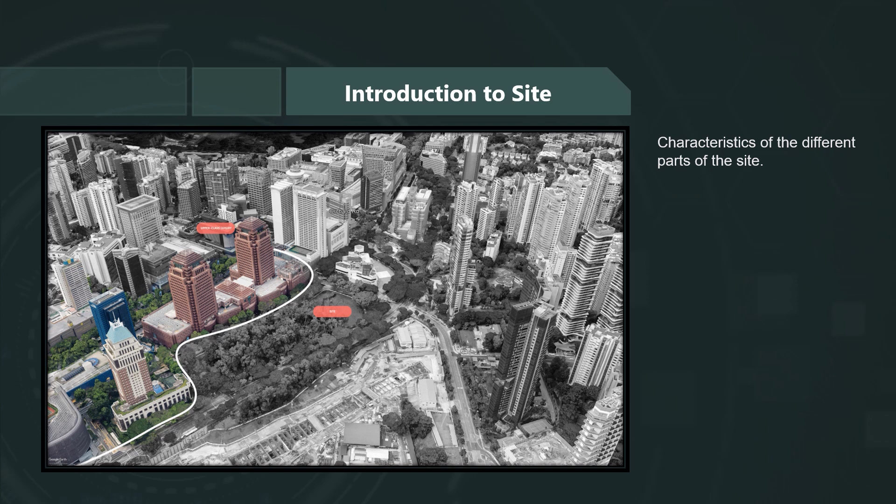The concept revolves around the notion of rebirth: to fall, floated to eternity, a metropolis reconstructed. Rebirth is adopted as the main focus, to rise from the ashes to become something greater. A cycle of life and embracing death, to put it simply.

We saw Orchard Road as this fading metropolis losing its shine as a premier shopping district compared to the late 90s. Our project is envisioned to be an agent to support the different surrounding buildings of Orchard, to help them transcend to the next stage of the cycle to prosper in a post-digital era.

Similarly, it acts as a vessel that gives life to new entities. We then integrate our idea inception process. Method 1 starts off by us redefining the idea of a mixed-use building by regrouping different programs.

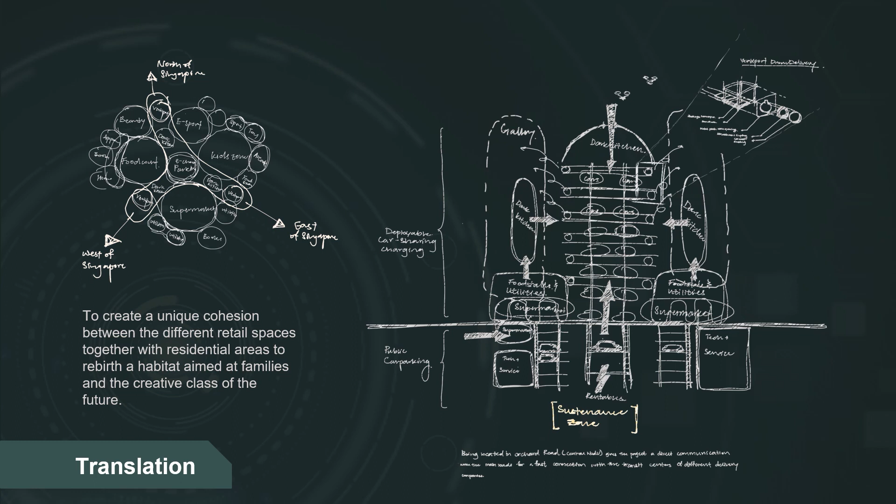It is then followed by computation. Here is a summary of our building components. The main idea is to create a bond between retail and residential to rebirth a habitat aimed at families and the creative class of the future.

Delving into some of our key challenges, we had our differences in ideas and priorities, but the bigger issue was the limited physical collaboration due to the COVID situation, and we were forced to communicate online during the most crucial parts of the design stage. Moreover, the limited learning resources was a struggle for our young team.

Nevertheless, we got to witness the beauty that comes about with the collaboration of engineering with architecture, and it exposed us to a whole new world of software.

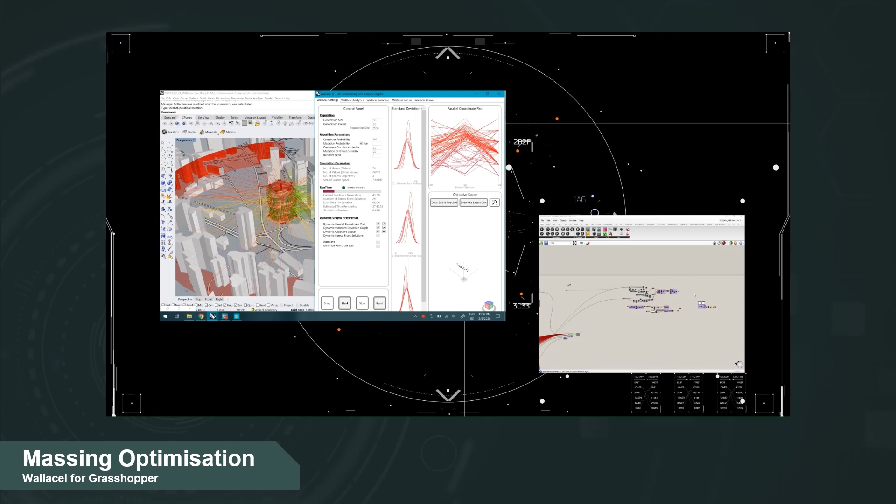For massing optimization, the Wallacei tool for Grasshopper was used to optimize the initial form with the help of 3 objectives: maximizing radiation, floor area, and views.

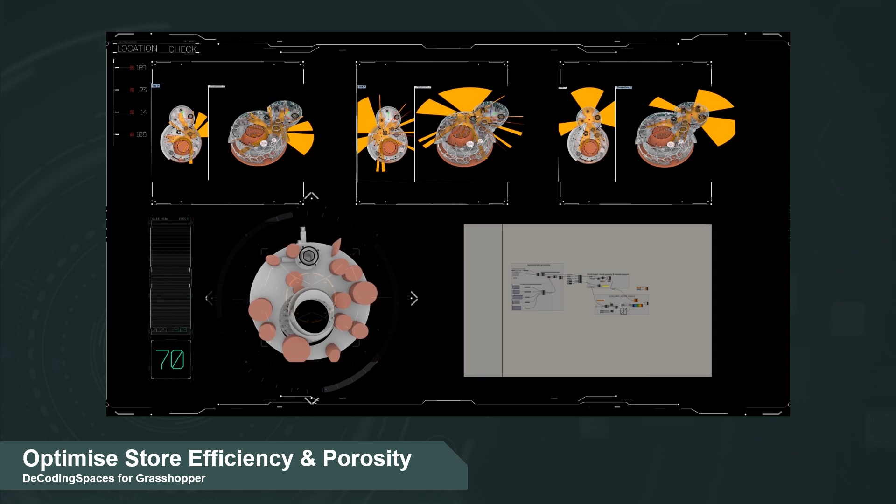The Decoding Spaces tool for Grasshopper was used to optimize efficiency and porosity of retail stores, resulting in a recreation of a marketplace and maximizing opportunities for free wandering.

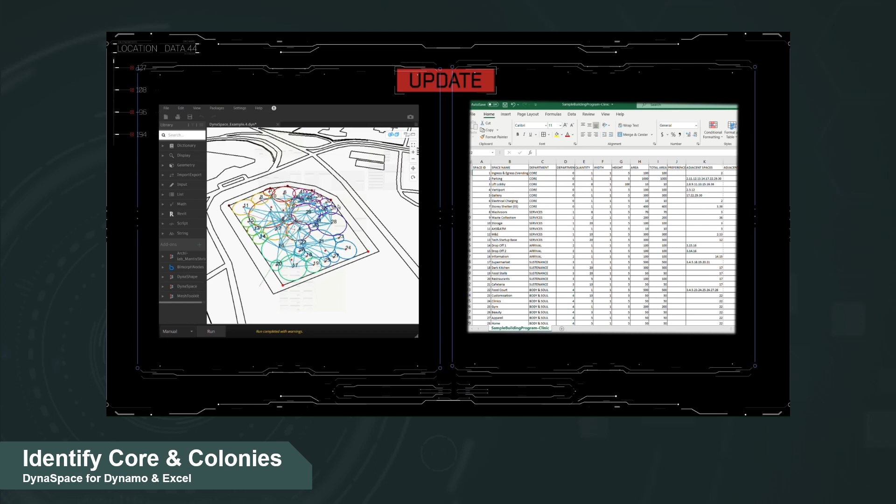With the aid of Dynaspace on Dynamo and an Excel sheet, it identified the estimated location of the central core, 3 colonies, and small programs. The 3 colonies are namely sustenance, body and soul, and play.

Lunchbox tool for Grasshopper was used to model out the external and internal diagrid structure of the central core.

Autodesk Flow was used to run the wind analysis, which helped us optimize the location of the spheres. This ensures that ventilation is maximized in the 3 colonies.

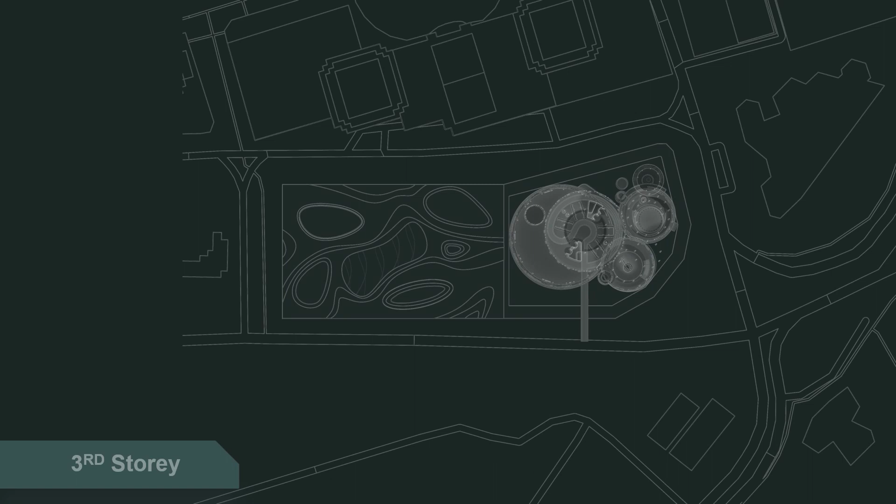The 3rd story shows the intersection of all zones and colonies. As it goes higher to the 17th floor, there is a swimming pool, jacuzzi, together with the service apartment units. The service core is in the center.

Co-working tech offices sparsely fill the central core. A vertical delivery system is used for transporting goods and purchases.

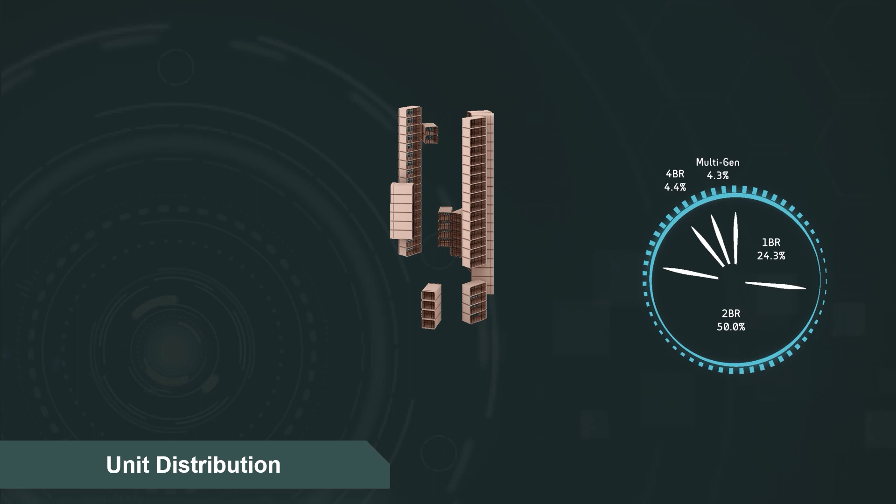The unit distribution of the service apartments are made up of 24.3% 1-bedroom units. Here are some schematic plans.

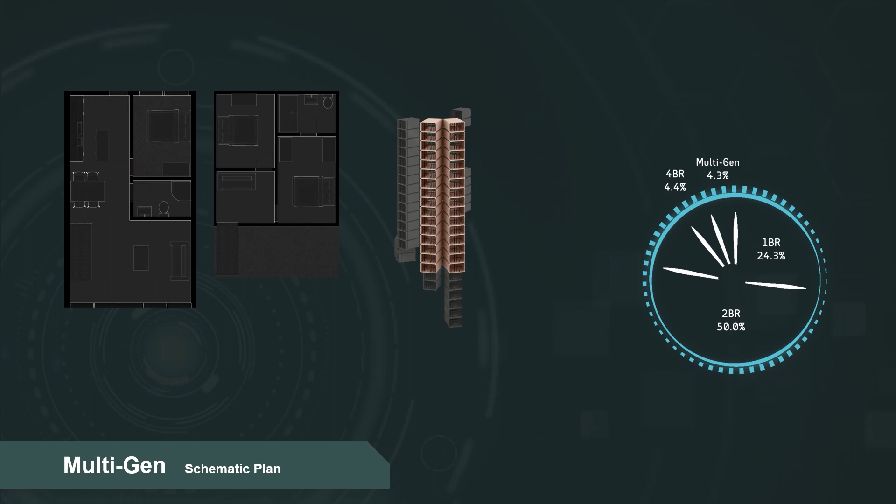Moving on to the 2-bedroom units with 50%, 4.3% multi-generational units, and 4.4% of 4-bedroom units. This is an interior visual of a unit.

Let us take you through the commercial spaces in the building. In the Body and Soul colony, there's a spa and a jacuzzi accessible by both service apartment guests and other patrons. A playground is designed to allow kids to play with their parents or grandparents.

The idea was to create a cohesive environment for young families. Themed family parks like Kidzania are able to take up spaces in the play colony.

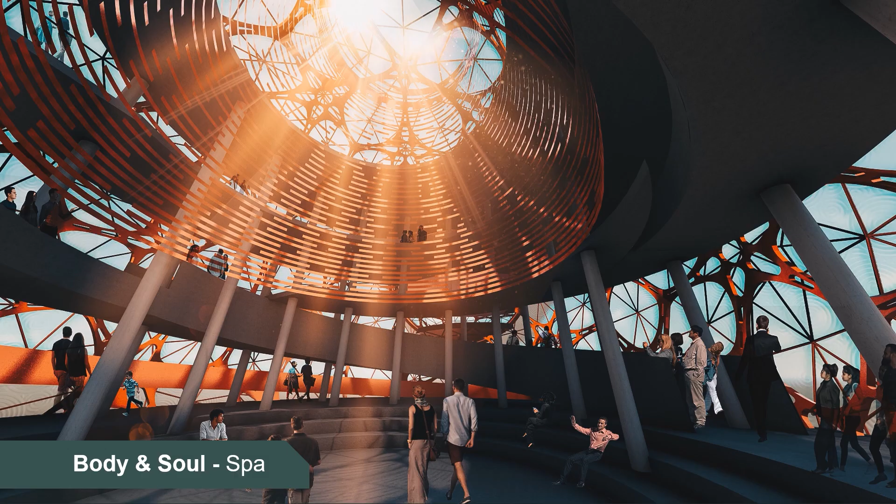Descending back to Body and Soul, it is designed to allow some light in to set a calming mood, to allow patrons to find some spiritual comfort.

This is when technology takes over. The Internet of Things is a fundamental aspect of a smart city.

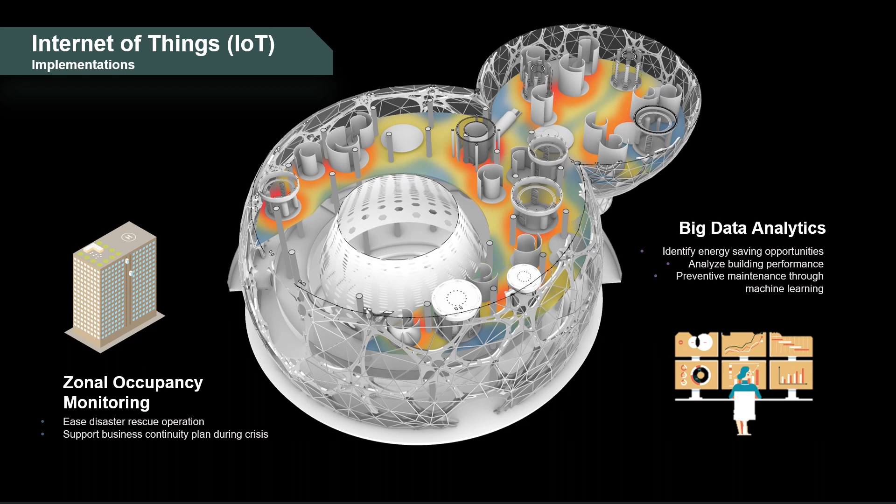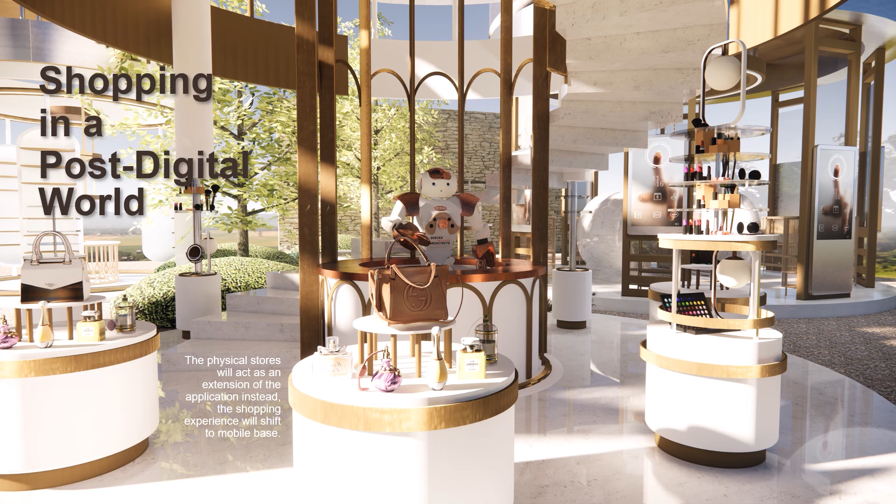A few of our implementations would be zonal occupancy monitoring, big data analytics, image recognition and heat mapping, and BLE beacon technology. Shopping in a post-digital world will have physical stores act as an extension of their mobile app. Other features include much faster payment systems where one can walk out of a purchase. Customer recognition is implemented to personalize the experience, along with self-checkout kiosks.

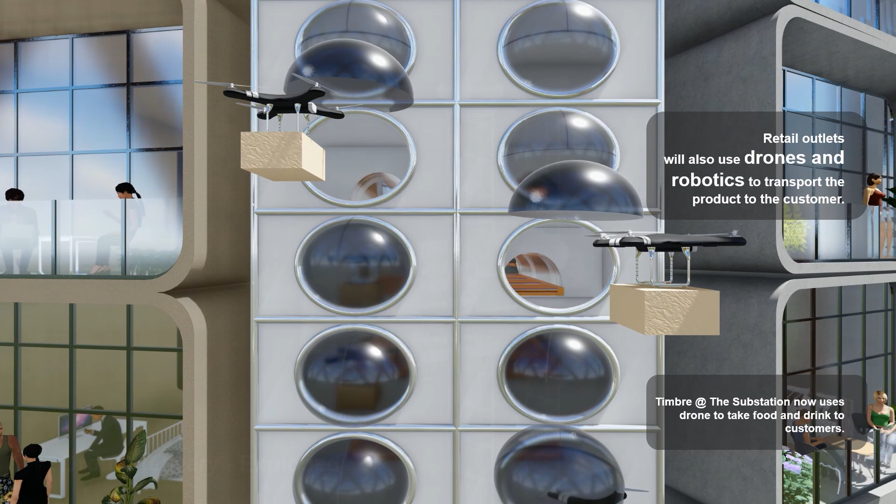Retail outlets will now be able to use drones as a vessel for transportation. The internal structure for the delivery tubes and drones is as shown.

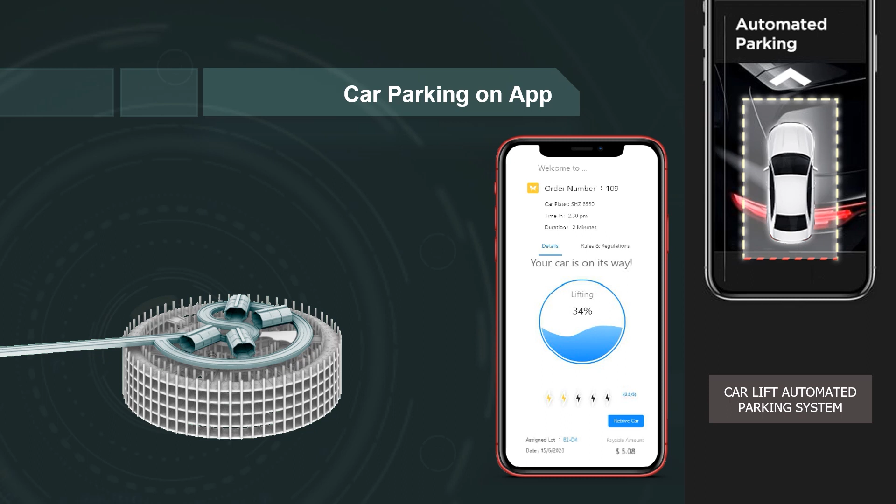Introducing the mobile app, catering to developers, shareholders, apartment guests, and shoppers. A store voting system keeps owners informed of trends and performance levels. An application will be invented to provide a smooth car parking experience. Applications can also keep updates on events held in the esports arena located at the Play Colony. AR and VR arcades are also accessible to the public as they rise in popularity and demand.

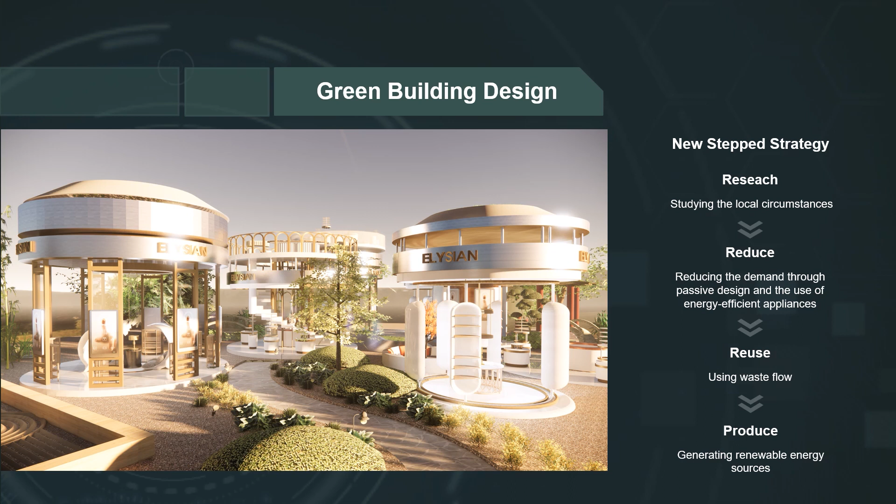When designing the green building, we applied the new stepped strategy developed by Delft University of Technology. In our design, local circumstances such as climate and facilities were first identified, then generated on-site to minimize dependency on energy produced by fossil fuel.

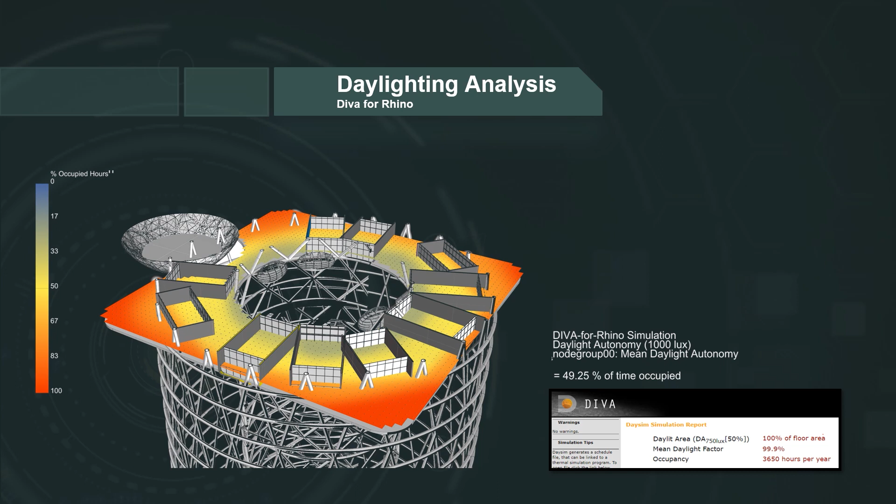The daylighting performance of the space is analyzed with software called DIVA. This is the simulation of one of the marketplaces, which has a facade made of smart glass. The result shows it can be operated with daylight during 50% of its operating time, with a target illuminance of 750 lux. With the help of Ladybug, we were able to conduct solar analysis on the exterior facade.

This further minimizes solar heat gain. The slide above depicts the shadow cast at different parts of the day for the June and December solstice.

This is an overview of the key features integrated into the building. An underfloor air distribution network is chosen. On top of that, we hope to cut down electricity usage by using VVVF regenerative lifts, which can save up to 60% of the energy used by lifts.

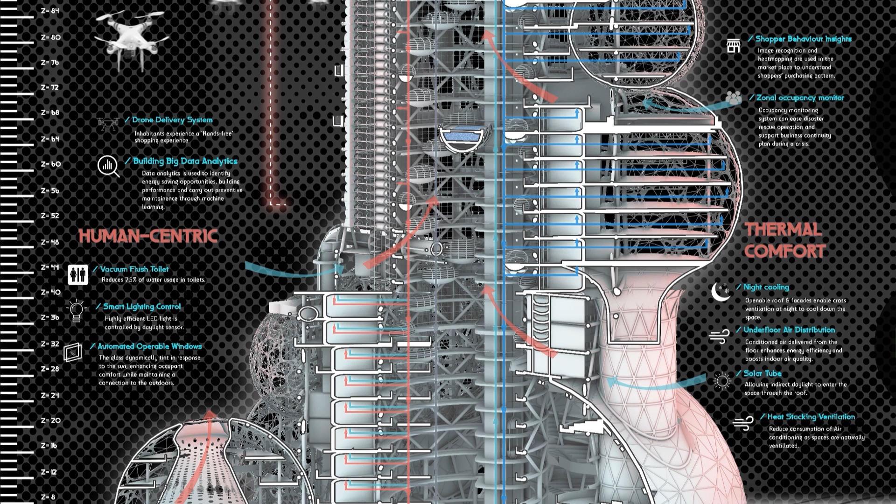The building supports a heat stacking effect in an effort to naturally ventilate spaces so as to reduce reliance on air conditioning. Rainwater is harvested from the rooftop and facades, and will subsequently be used for the building's flushing needs and irrigation.

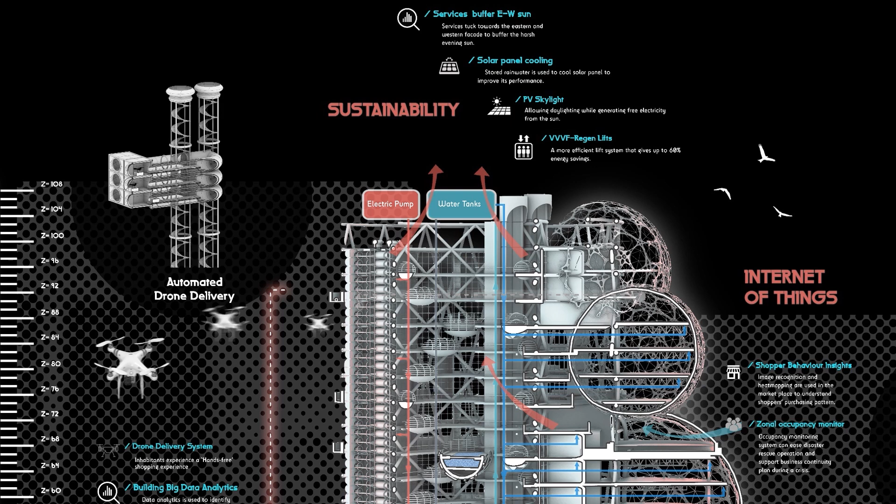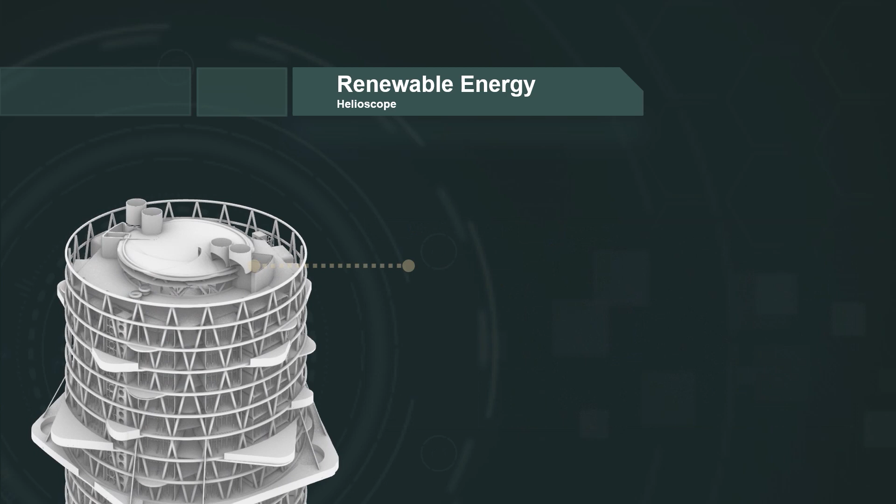Being in the tropics, solar energy is widely available on-site and will be harvested with polycrystalline photovoltaic cells. An integrated photovoltaic glass skylight will be used for the roof of the core, using software such as Helioscope. The peak capacity of the PV system is estimated at 120 kilowatts.

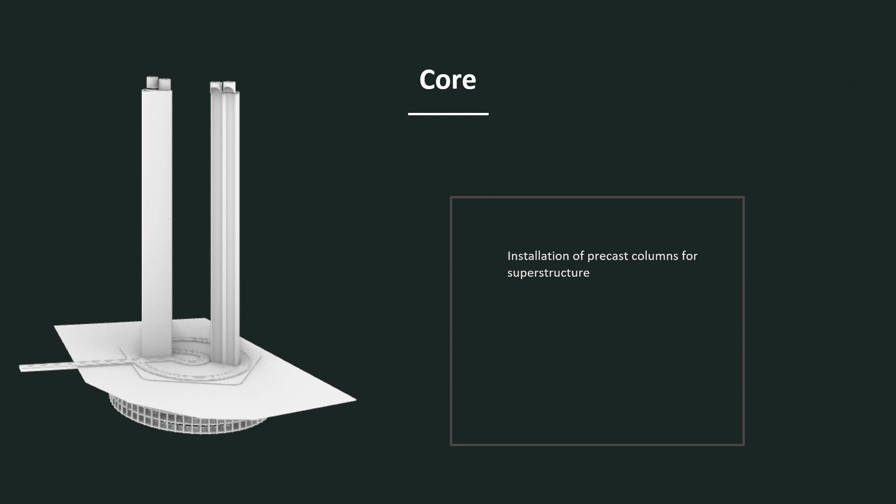After land surveys and site planning works are executed, a top-down basement construction shall commence to allow for superstructure works to begin concurrently. The voids used to transport material will be converted into the shaft for the car lift. Subsequently, the shear walls of the passenger lift core and the columns of the steel diagrid will be established.

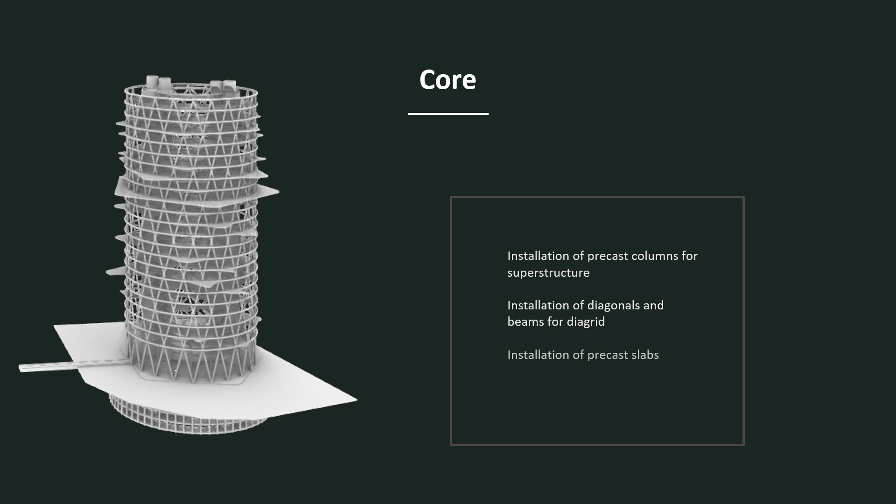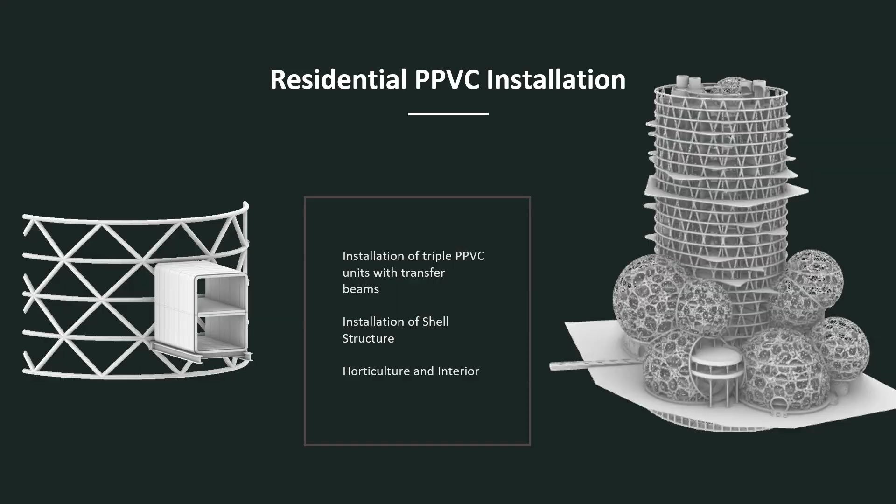With our unique parametrically defined structure, a 3D printed fused deposition modeling process using steel fiber reinforced concrete was favoured. Next, our precast, pre-finished lightweight steel residential units will be installed, followed closely by the shell structures of the spheres below. With considerations for sustainable materials, we have chosen steel as a primary building material, as well as cutting-edge electrochromic glass to be installed in our facade.

By standardizing our building's main structural members within the three most common sizes, a preliminary evaluation showed that we would be able to achieve a 103 buildability score, with environmental performance of our mixed development at the heart of our design.

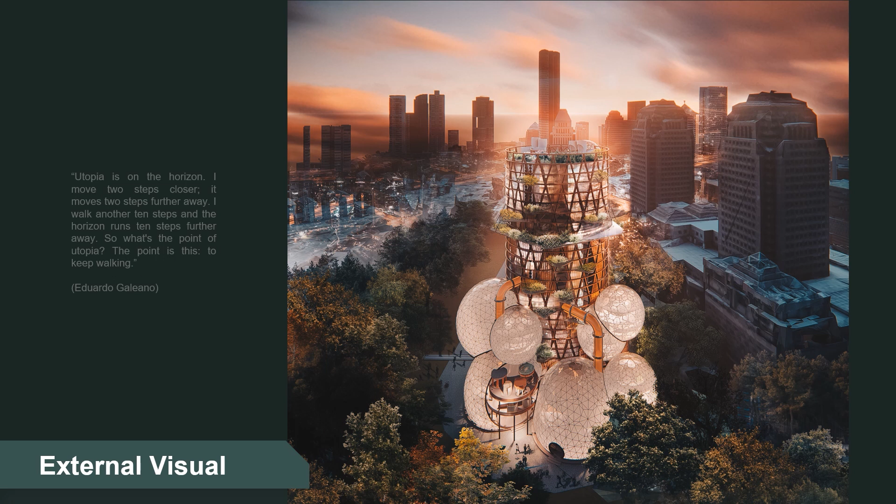Mankind's quest for utopia will never halt at a final destination. One can do it right, and it still will never last forever. This project seeks to serve an evolutionary study befitting the near future that leaves blissfully when the time comes. Let us now launch into the inquiry of Neo-Typologies and what the future holds.

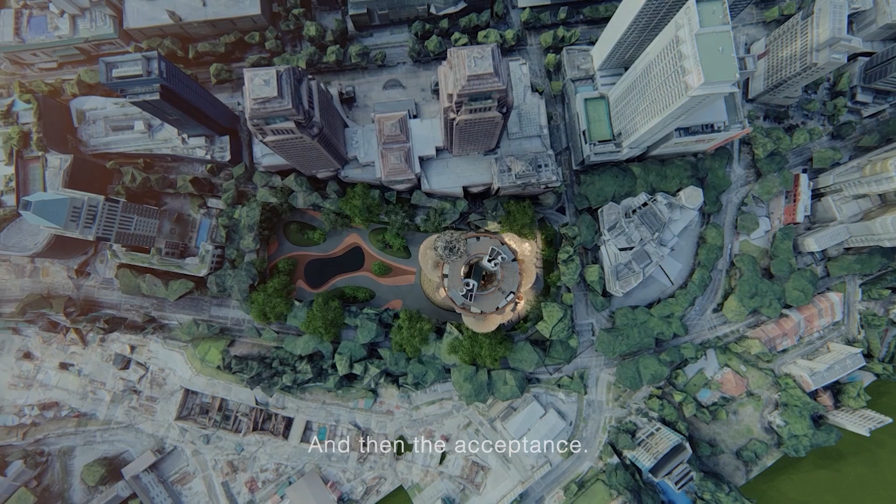I remember like it was yesterday. The panic, the hysteria, and then the acceptance. Are you ready? Good luck!